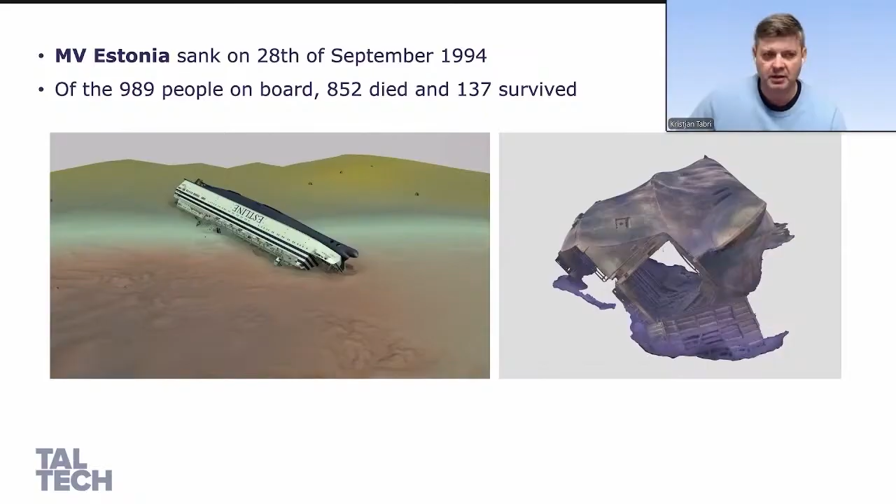After the accident, there was an investigation into what went wrong, why such a vessel sank, and what could be done differently in future. The official investigation was already published in 1997, and it stated that the main reason was that the bow visor of the vessel detached under wave loads, and this opened access to the car deck. When the ship got flooded, it didn't have enough buoyancy to stay afloat, and that's why it sank. Of course, there were always a lot of rumors or speculations around this accident.

Was this official cause really what actually happened, or was there something more involved in this accident? Actually, in 2020, there was new video footage which showed that the ship had quite a large damage on its side. There have always been speculations that there must have been a collision with some submarine or some explosion, that there must be something which made this ship sink, and that it was not only the bow visor that was the reason.

Those new video footage became available for two reasons. First, our technology has improved so much that we could go into 80-meter deep water and get very good camera images from this depth. Another thing is that over time, the vessel had rolled a little bit on the sea bottom, so it revealed what was under the vessel.

This fueled a lot of new speculations, like, hey, we told you there must have been something strange with this accident, because now you see there is a side opening, and this is the reason why this vessel sank.

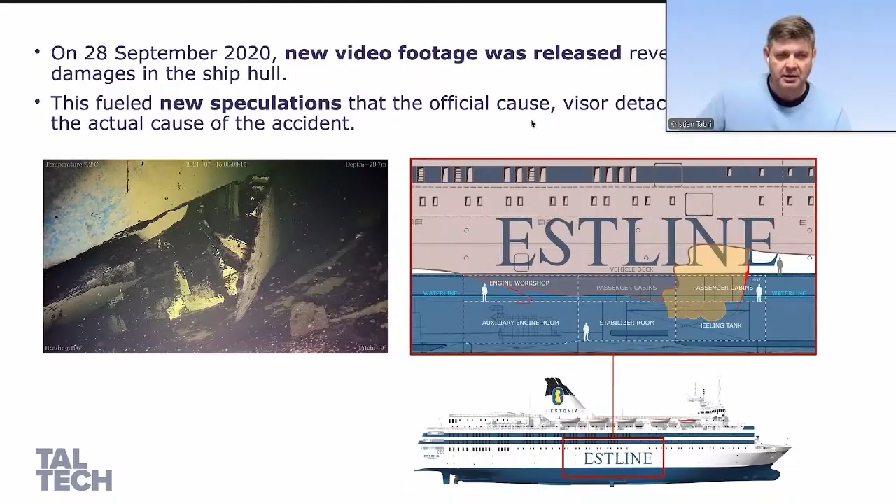This resulted in new investigative activities in 2020. Quite soon it was decided that a preliminary investigation had to be conducted to understand whether the whole investigation of the accident should be reopened. It's a little bit like official terms between those accident investigation bureaus. This initial investigation has now taken 5 years. Now it has been completed, and we can draw the conclusions of what we found out.

The aim of this new investigation was to collect new evidence and to model more or less the whole accident, how it happened. The investigation included quite a lot: a lot of surveys at the wreck site, sea bottom studies, wreck studies, and a lot of different robots were used.

The bow ramp of the vessel was taken to the surface for investigation, and the whole ship was scanned in as much detail as possible to get a full 3D image of the shipwreck as it lies on the sea bottom. This gives us a lot of information, or validation data, to see if we simulate something, whether we end up in the same condition and situation as what we see there now.

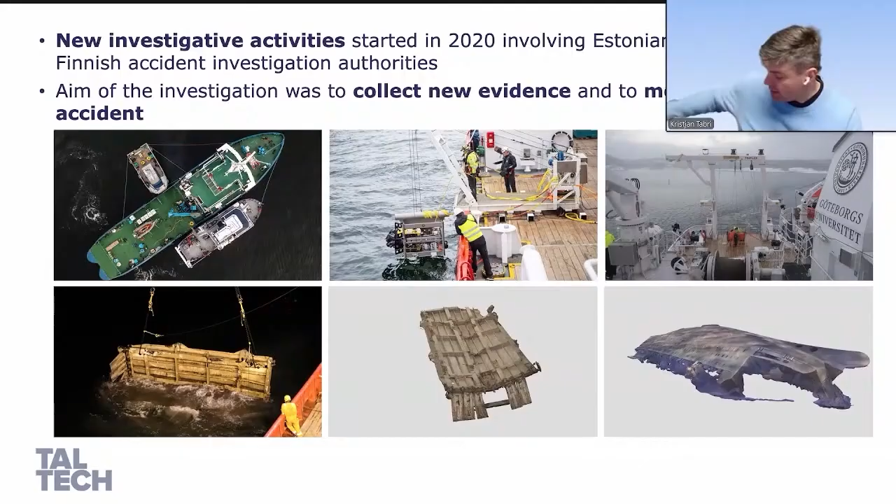Of course, we have to keep in mind that 30 years has passed, so the vessel has shifted on the sea bottom, and it has degraded further. There is some corrosion - of course it's 80 meters deep, so there is not that much oxygen there, but still some oxygen for corrosion. But anyway, a lot of evidence was collected, and quite some material was brought to the surface, which could then be used to validate and see how well we can simulate this accident.

But a little bit of background for the accident: the first Ro-Ro ships appeared in the Baltic Sea in the 60s.

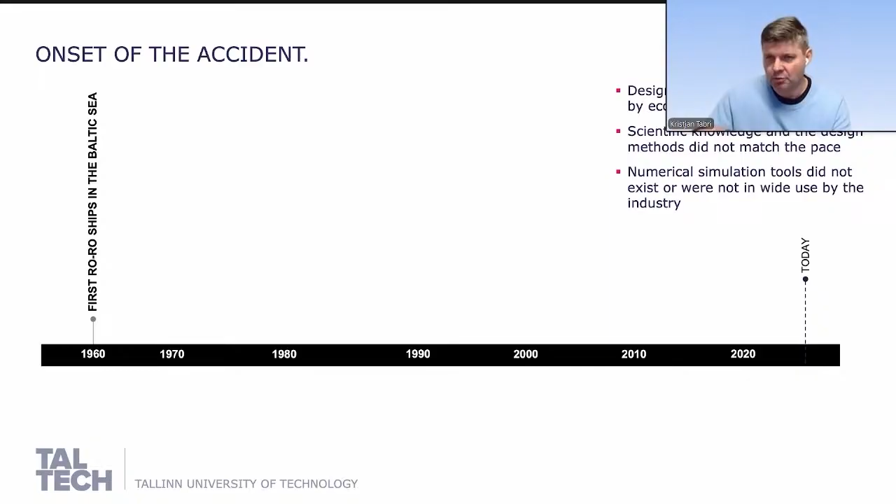Yeah, it was quite a new vessel type where the cars just roll on the ship deck, and also it takes on board the passengers. So it was quite a novel ship type in the Baltic Sea, which is a little bit specific with its relatively short and sharp waves.

But it turned out to be such a suitable vessel type for our waters that this number of ships started to increase with enormous pace. Actually, the increase in the numbers of these Ro-Ro ferries in the Baltic Sea was the greatest in the world. Nowhere else did this ship type see so large usage. For example, at the beginning of the 1960s, 900 trucks were transported by sea, but in the middle of the 90s it was already 140,000. So you can imagine how much more capacity there was to transport all these trucks.

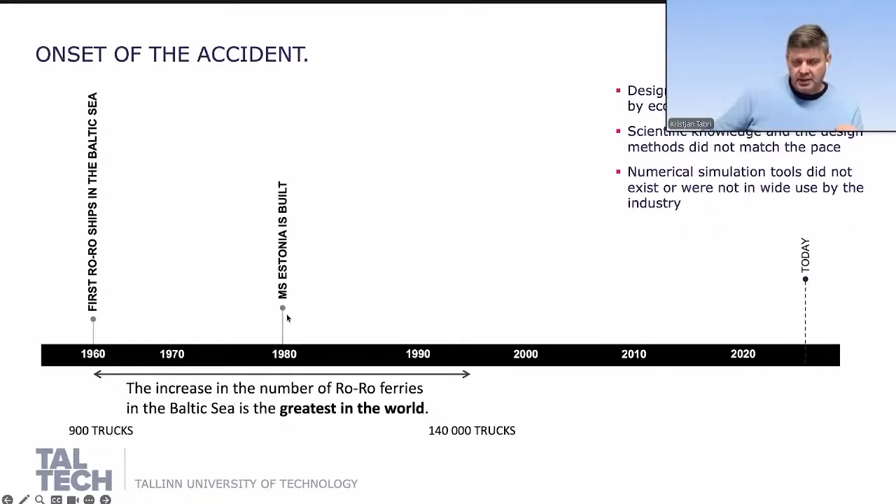The ship itself was built in 1980, so it was designed a few years before that. You can imagine how computers looked at that time - you didn't have this amazing set of tools, computational power, or artificial intelligence that we have nowadays. Your Apple computer looked like that. So you didn't have that many tools to design the ship. It was mainly paper and pen that was used for the designing.

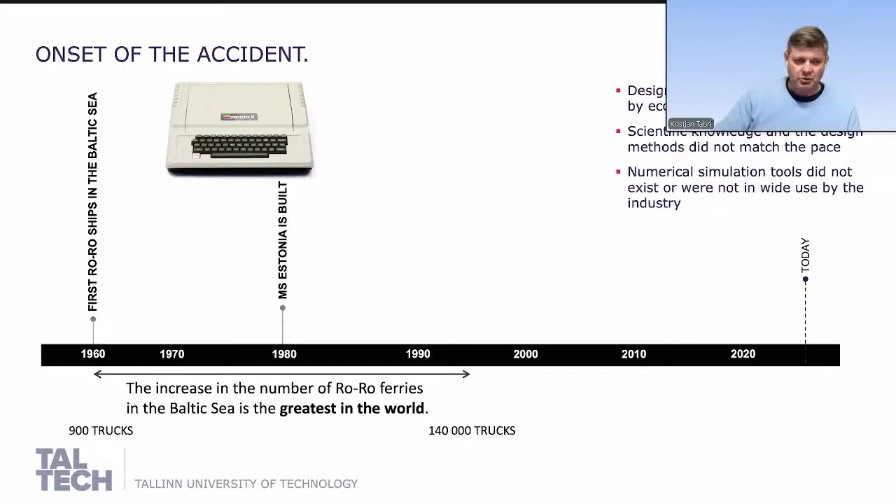Also, numerical simulation methods did not really exist at that time yet. They were there in universities, maybe in some bigger aeronautical companies who used some of the simulation tools, but in the marine engineering field the numerical tools were not really used because they were so new and there was no computational power. So it took 15 to 20 years before the numerical methods we use nowadays to design ships or maritime structures really started to have their role in the engineering or maritime industry.

We talk about computational fluid dynamics to simulate hydrodynamic loads on the ship, finite element methods to simulate how the ship reacts to loads, or fluid structure interaction methods that allow us to put together the water and the structure. So these methods were not there when the ship was designed.

Also, progressive flooding simulation software, which allows us to simulate in very complex ships like Ro-Ro ships, RoPax ships, or cruise ships how the water flows or moves inside the ship if there is an accident, these tools only started to emerge in the middle of the 2000s. Before that, it was very hard to assess such a complex ship - what would happen if it got flooded. So there was quite limited availability of what you could use.

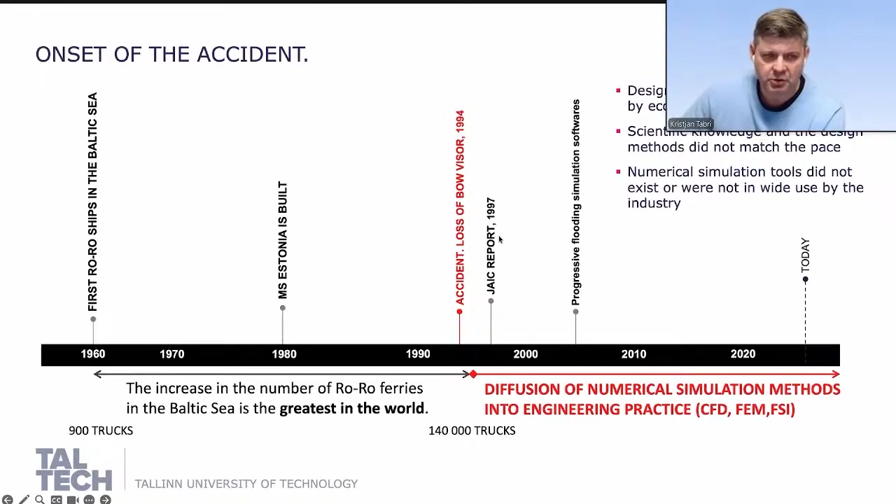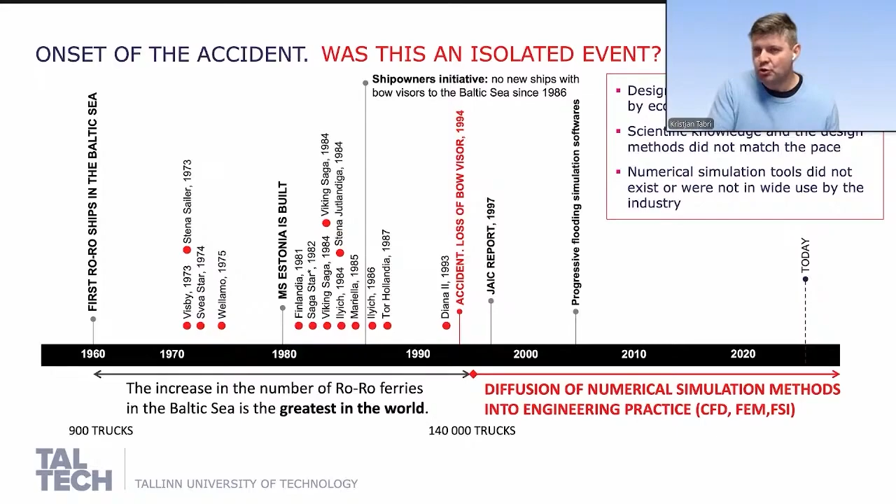Actually, already in 1986, eight years before the accident, the ship owners agreed that they would not build ships anymore with that kind of structural configuration, because it was not good enough. So the knowledge was there, but the ships, of course, still kept sailing. Basically, these ships came to market because the economic competition was so harsh and there was such a strong need for the vessels. But the scientific knowledge, the design methods, and the simulation tools didn't really pick up. So there were no tools to understand how these ships would behave in the Baltic Sea.

And actually Estonia had a very poor design in how the visor works. The visor opens, then the car ramp is lowered, and the cars could go into the ship.

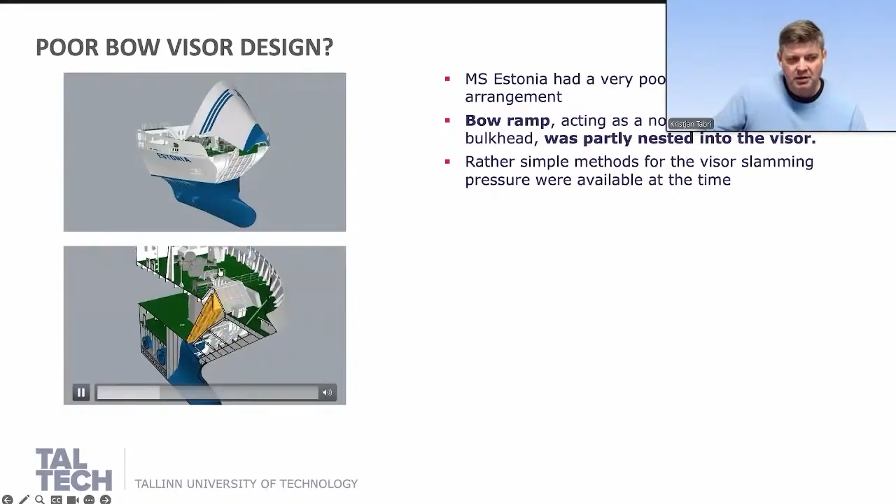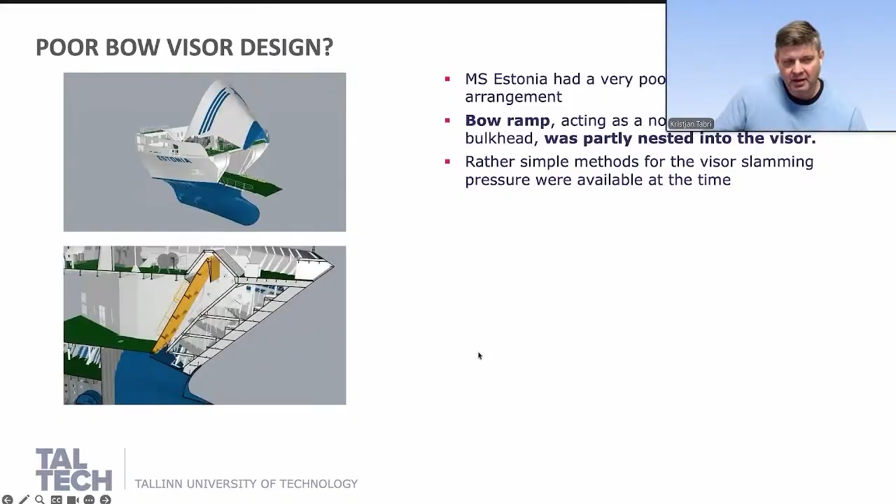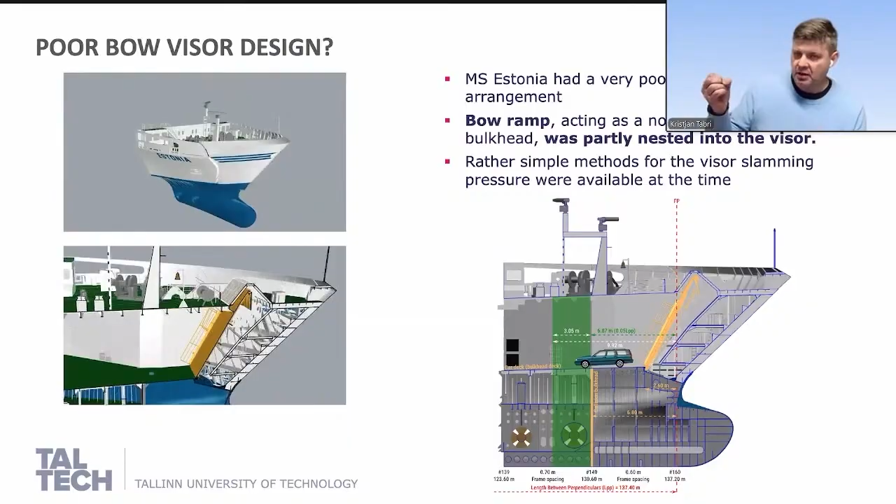In Estonia, the design was such that the car ramp was relatively long, so it had to be fitted partly inside the visor. This means if the visor falls off, it pulls open the bow ramp. But the bow ramp acted as a collision bulkhead. Ships require a collision bulkhead so that if something happens in the bow, it prevents water from entering the ship. In Estonia, the design was such that if the visor failed, the collision bulkhead also failed. So if one piece falls off, the enormous car deck becomes free for water to enter the ship.

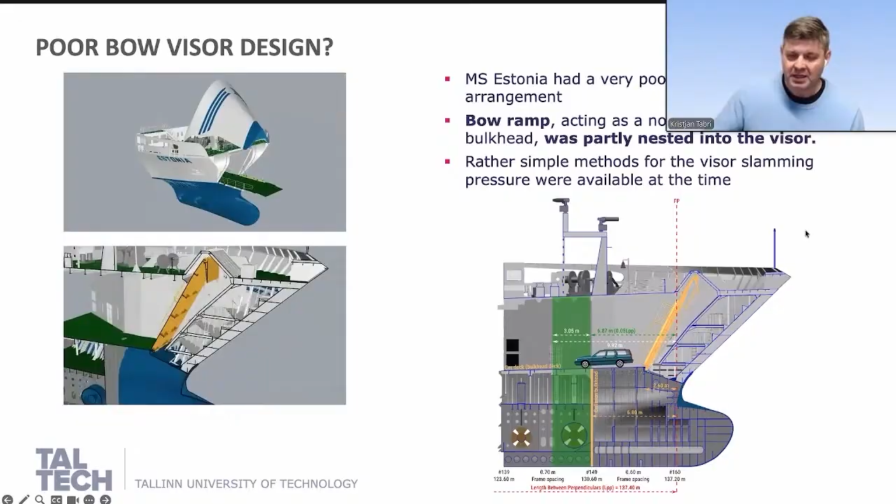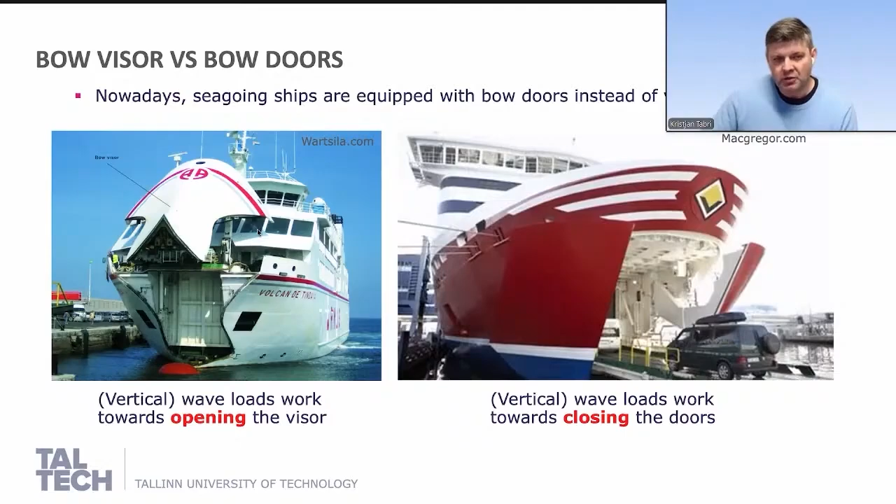What's the situation at the moment? Seagoing ships can't have visors anymore because the design isn't safe enough. Here is a ship with a visor, but if you go to a modern Ropax or Roro ship, you don't see a visor that opens up. You see bow doors which open sideways, and cars enter through these doors. What's the principal difference? For the visor, wave loads try to open it by pushing this rectangular part up. For the bow doors, waves try to close the doors, pushing them against the ship hull. This is a much safer solution compared to a visor which has to fully open. Now all ships going far to open sea need bow doors instead of visors.

Our aim in the project was to really simulate this whole process, so we did quite many different simulation models. We started with wave loads acting on the visor, looking at model scale experiments done in 2007. We prepared a computational fluid dynamics model to simulate wave loads numerically acting on the ship. We also prepared a multi-material arbitrary Lagrangian-Eulerian model to evaluate how much the loads changed once the visor was already open. With those loads, we had a very fine finite element model of the bow area where we then applied them.

The waves come in groups, in sequences, so we could apply these loads to the visor and see how it would respond, and whether the wave loads we estimated were present on the night of the accident were sufficient to break the visor structure. We also prepared a whole ship model to simulate the bottom contact, to see whether the damages found in the new video footage could have occurred when the ship hit the sea bottom - meaning they had nothing to do with the sinking, but occurred as a consequence of the accident.

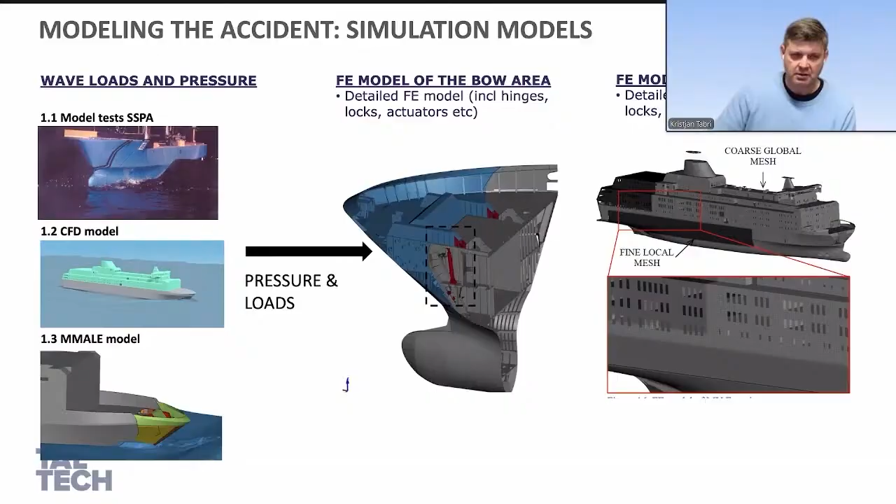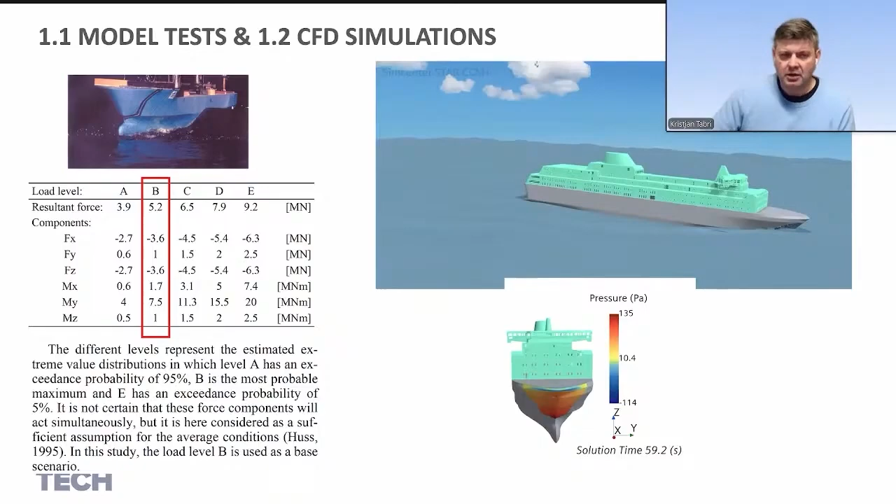Computational fluid dynamics simulations look like that: you have a ship, you have waves, and you can see the pressure distribution and how this pressure correlates to different wave heights and wave directions. So you could get a quite good understanding of the loading condition in your bow structure.

We also did more complex simulations where we modeled the bow visor as a separate part from the ship so that it could pivot. When the visor is closed to the ship it experiences certain loads, but once it's allowed to move, the load level drops a little because the visor simply moves away from the waves. We needed this to construct the realistic load sequence so we could simulate the process from when the visor is fully attached until it's fully torn off the ship.

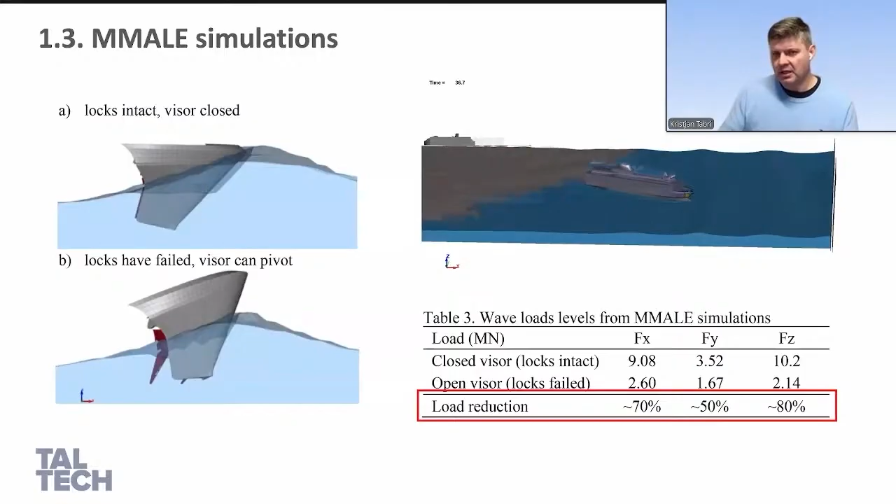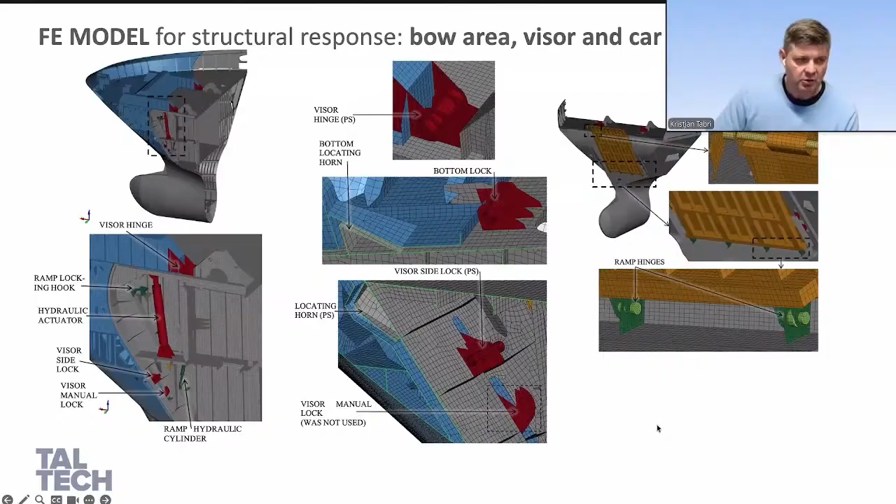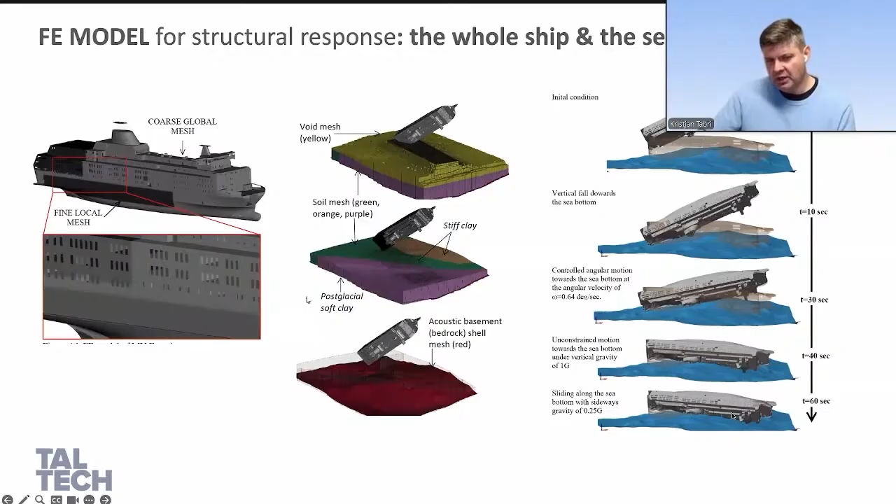This is more or less how the simulation looked. We started in the condition when the ship was already approaching the sea bottom, and then simulated how it fell to the sea bottom. I will show some videos a bit later.

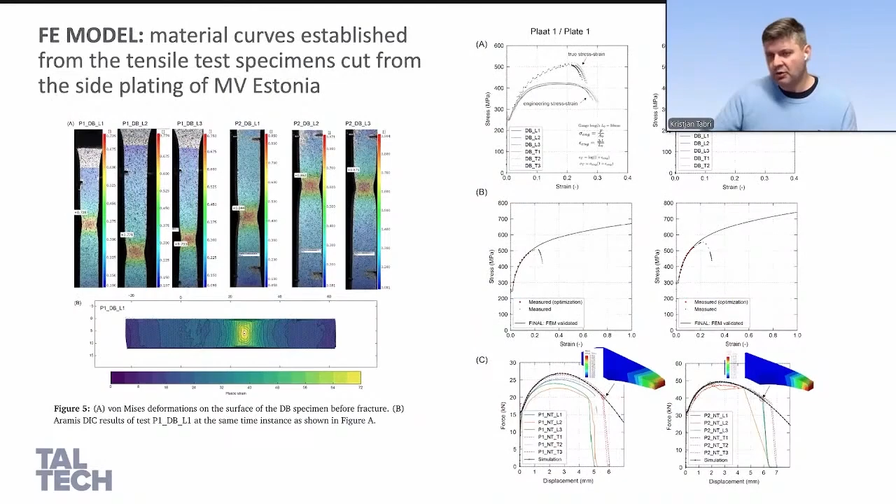Also, some specimens were cut from the actual shipwreck to see what the material properties were, so we were really using the actual materials that the ship was made of.

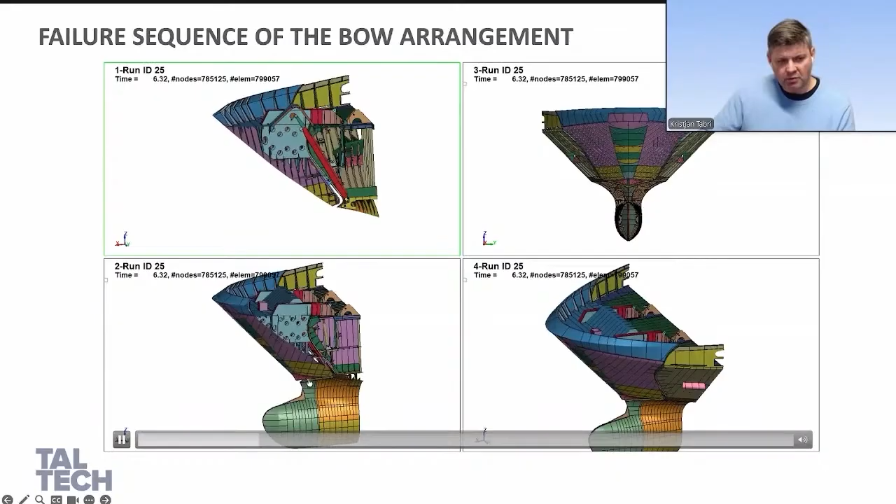This is now the visualization of what happened with the bow structure first when the large waves hit. The first lock, also called the Atlantic lock, was broken. Then the ship had also side locks, which failed very quickly after the bottom lock failed.

Then the ship had some hinges here on the deck. These hinges were also broken quite fast. And then the visor remained attached to the ship only through those quite large actuators or hydraulic cylinders.

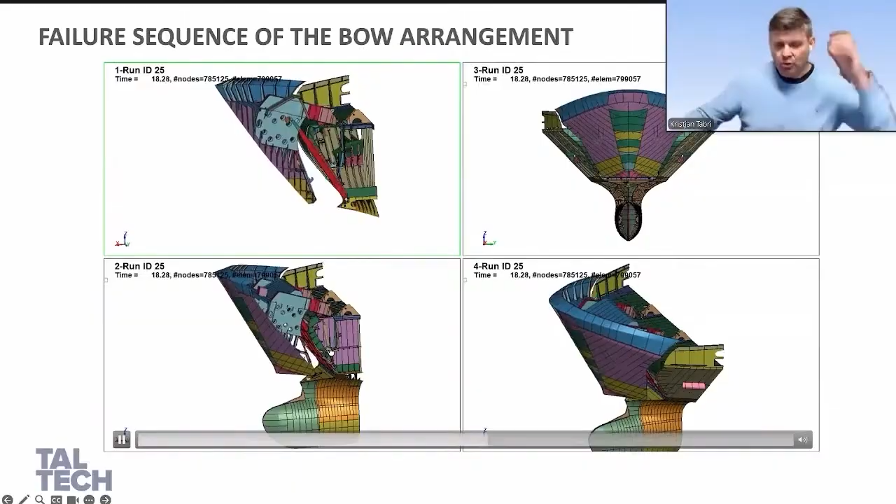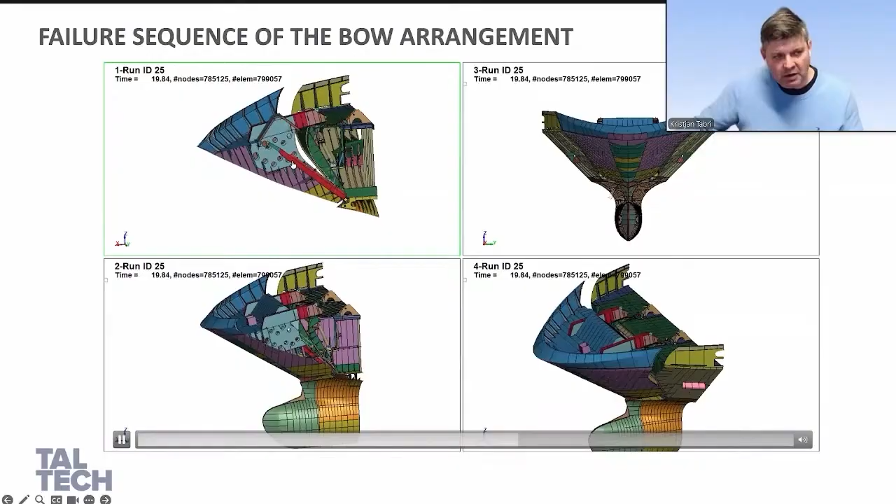Sorry, it's restarted. You see that the bow—I'll scroll back a little—as this visor is moving, it also pulls open the car ramp already, and the movements are quite violent.

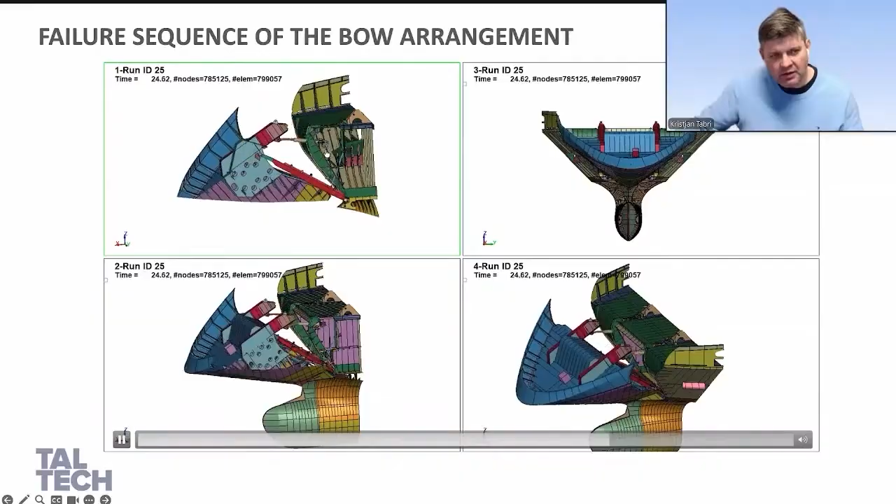So what happens is that these cylinders, which are still holding the visor in place, are pulled through the ship. In front of the ship, it really pulls those cylinders through the forward wall or forward bulkhead of the ship, and we really see in the shipwreck also these locations where the cylinders were pulled through.

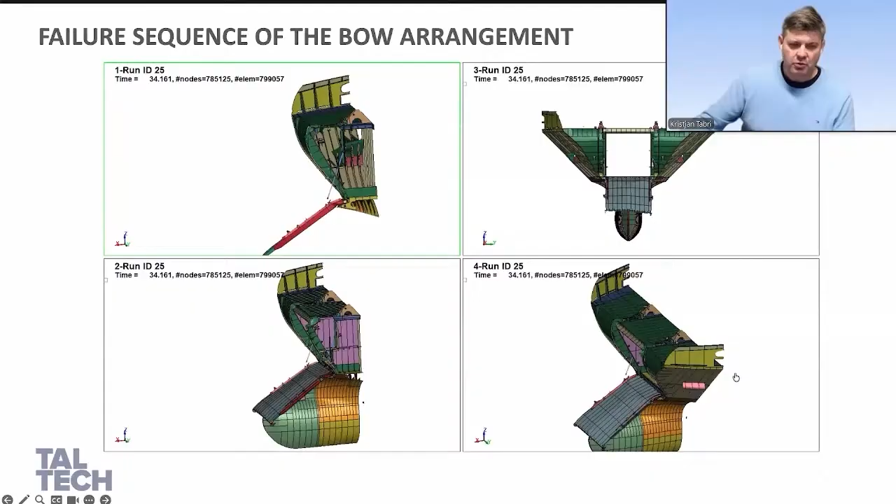So this is more or less how we foresee what happened.

We also had a lot of evidence from the shipwreck, what was left in the wreck, to check whether our simulations corresponded to this. Also in our simulations, we saw that the cylinders were pulled from the deck plating and through the front wall of the ship.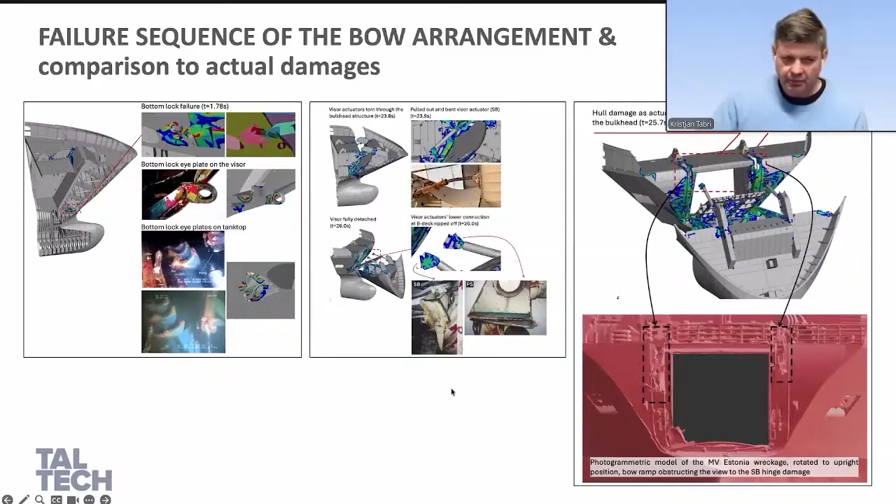And also in the wreck, you see very clearly where those cylinders have been pulled through. So our simulations correlated actually quite well to the reality we saw.

Also, the visor itself has been brought out already years ago. It's in Sweden, and it has quite a lot of damage actually on the visor. We were also capable of explaining very well where those damages came from.

One damage, here, came when the visor fell off and hit the bulbous bow. Then the visor rolled itself around and remained floating in front of the ship for a few seconds, and the ship hit the visor once again, causing this very large damage. But its damage shape corresponds very well to the ship's bow shape.

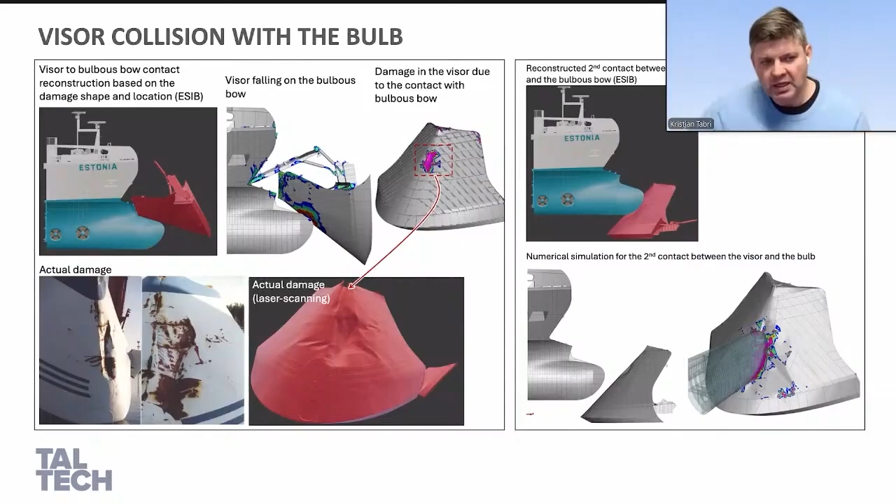So with nowadays tools, we could really explain almost every scratch in the paint. Of course, it's a bit of an exaggeration, but you could really explain most of the deformations that we see in the structure.

Same with the bow ramp. The visor starts falling off, it opens the bow ramp, and the bow ramp also experiences different kinds of deformations. In the simulations, we could repeat those deformations quite well.

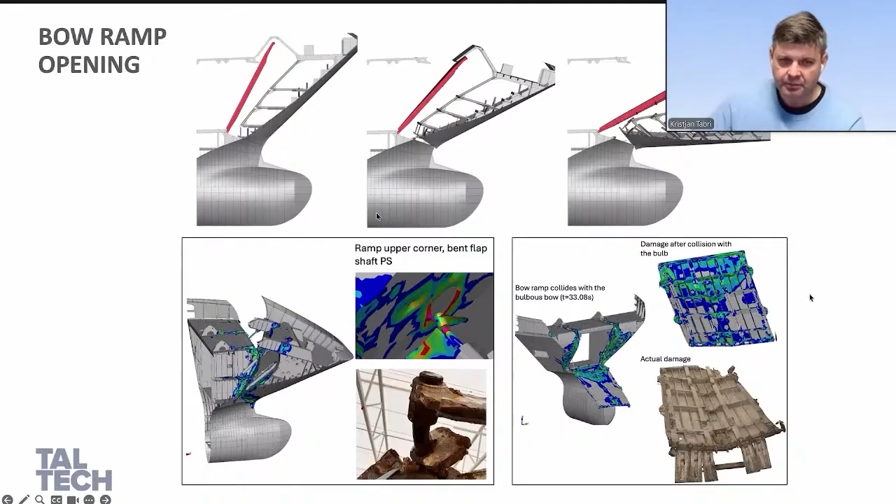Another interesting assessment we did was that after the accident, the bow ramp was still attached to the ship, and that was more or less the initial condition: the shipwreck was on the sea bottom and the bow ramp was still attached to the ship.

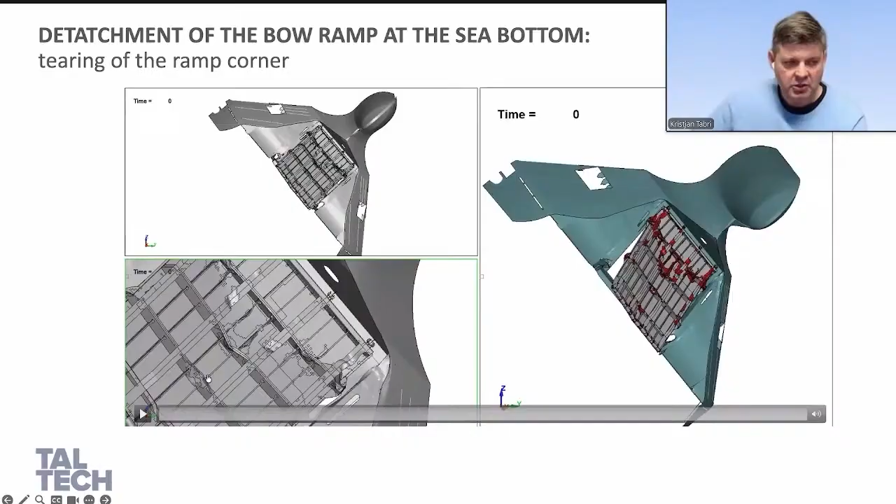But now in those recent investigations, I think in 2021 or 22, they discovered that the bow ramp has fallen off. So what we then simulated was to estimate where there would be corrosion damage in the bow ramp, and what the corrosion could be over 20, 25, or 30 years.

We simulated how, if this corrosion has developed and the ramp is still attached to the vessel, it would be torn off from the ship. And actually, we also managed to achieve the situation we see in the wreck at the moment, that a piece of the bow ramp is still attached to the ship, but the ramp itself has been torn off.

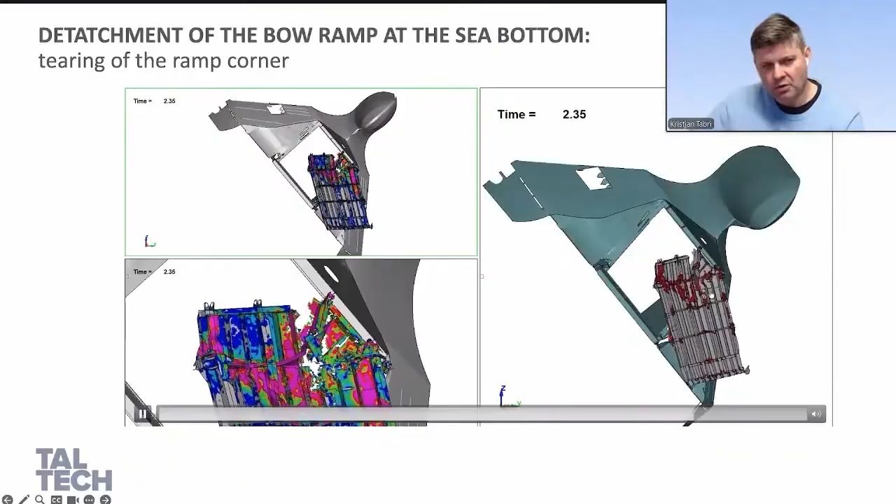So we assumed that the corrosion is strongest in the regions which get a lot of plastic deformation during the sinking, because that's where the paint gets damaged and you become more open to corrosion.

Also, if you look on the shipwreck, we see that the bow ramp lies next to the ship, and part of the bow ramp is still attached through two hinges to the ship.

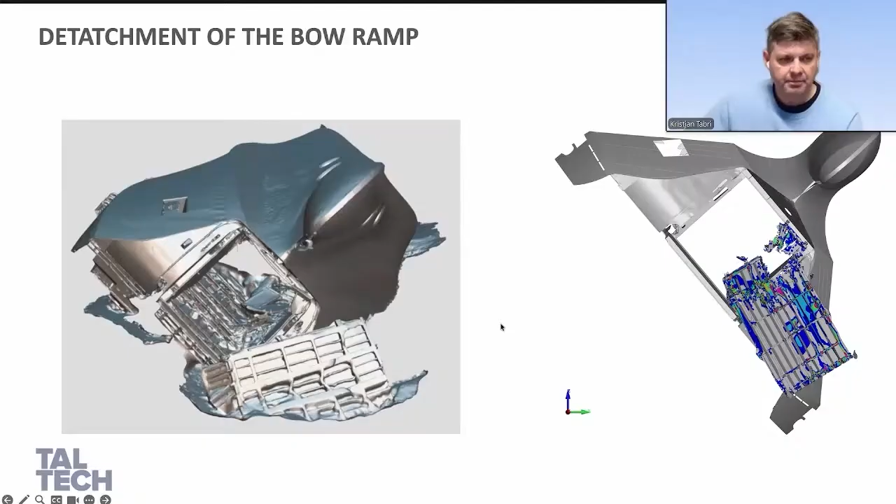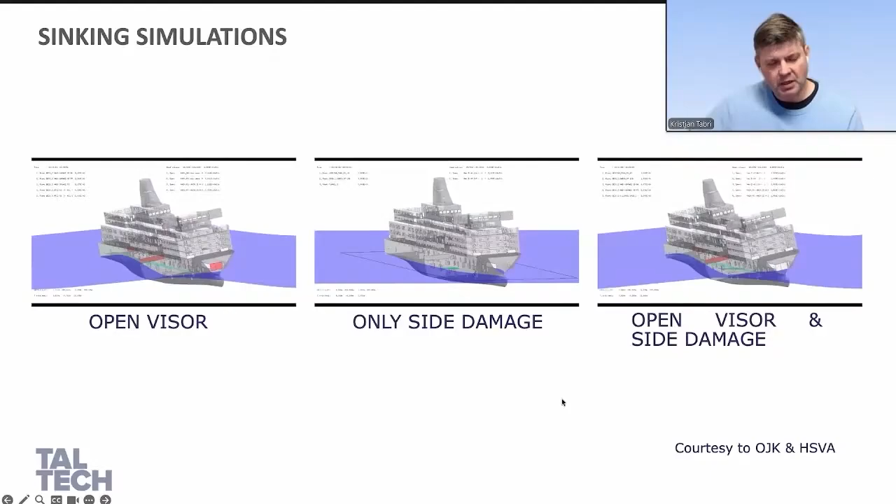This is not our work now, but it's a German consortium which was subcontracted by the Estonian Accident Investigation Bureau.

They also simulated the different scenarios: how would the ship sink if the visor is open, how would it sink if there would only be side damage, and how would it sink if the visor is open and there is also side damage. So you could really take the different assumptions and see how the ship would behave in those different conditions.

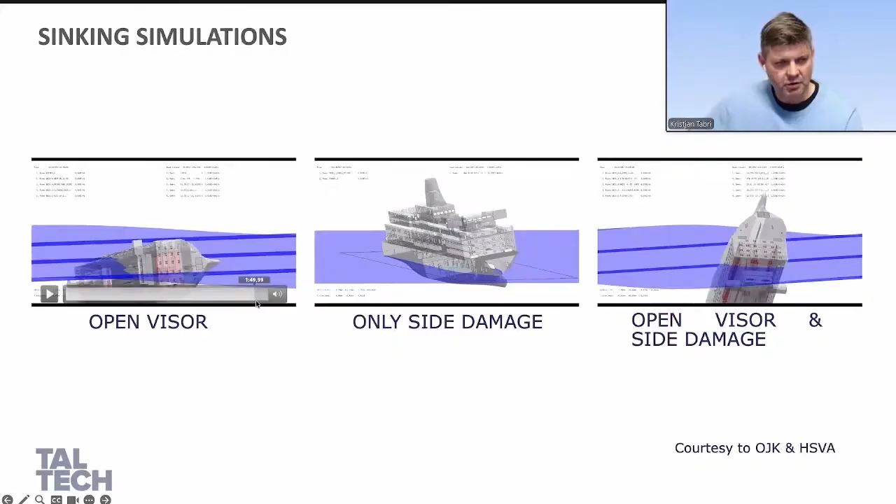Only with side damage, the sinking was much slower compared to what happened in reality. With side damage and an open visor, it was a bit too fast. Actually, if the open visor was assumed, then the sinking sequence and duration corresponded quite well to the witnesses' testimonies. I'll scroll a little further, but that's how these simulations ended.

We also conducted simulations of how the ship would hit the sea bottom. Here we only visualized the acoustic sea bottom - we removed the soft sea bottom because otherwise it's not that easy to see what goes on there. But that's basically how this bottom contact process was simulated.

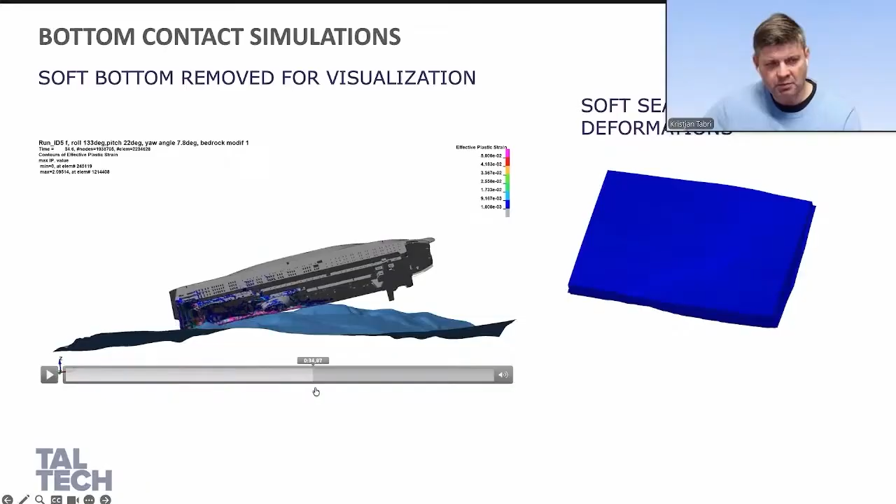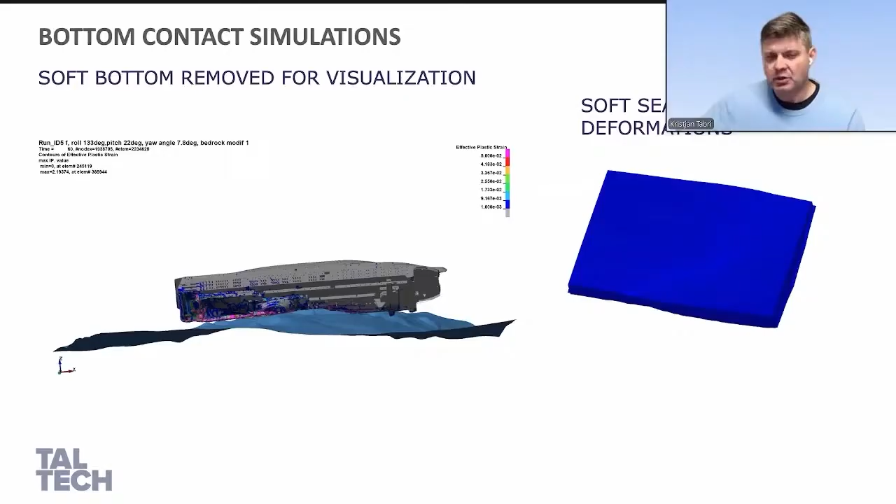As a result, we could get quite a good estimate for the damages that should be on the ship structure. We could then compare these to the 3D model of the shipwreck to see whether they correspond well. We also had this very soft sea bottom action on top here.

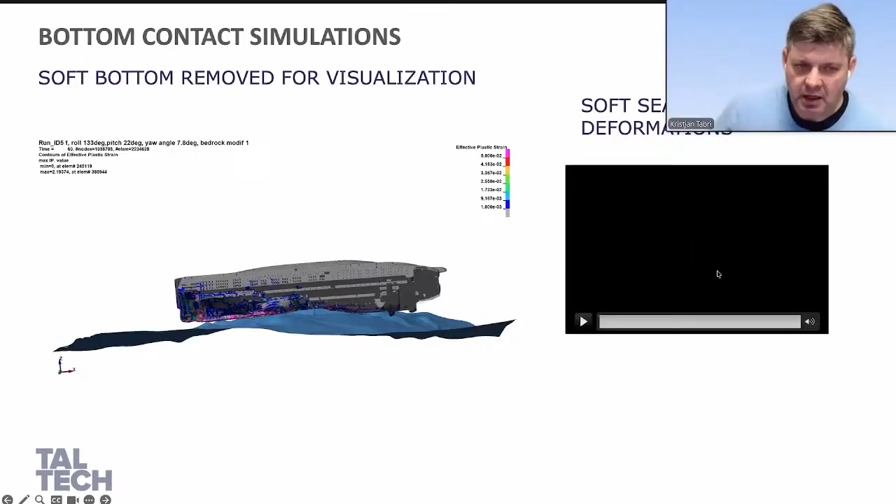This is how this soft sea bottom is pushed away. From some regions where the center part of the ship is, you see that this acoustic bottom becomes visible. This acoustic bottom is then the rigid bottom, which causes the main damage to the ship hull.

I see that I have only one minute left, so I'll quickly scroll through a few more videos which show how our simulations correspond to the current position of the shipwreck.

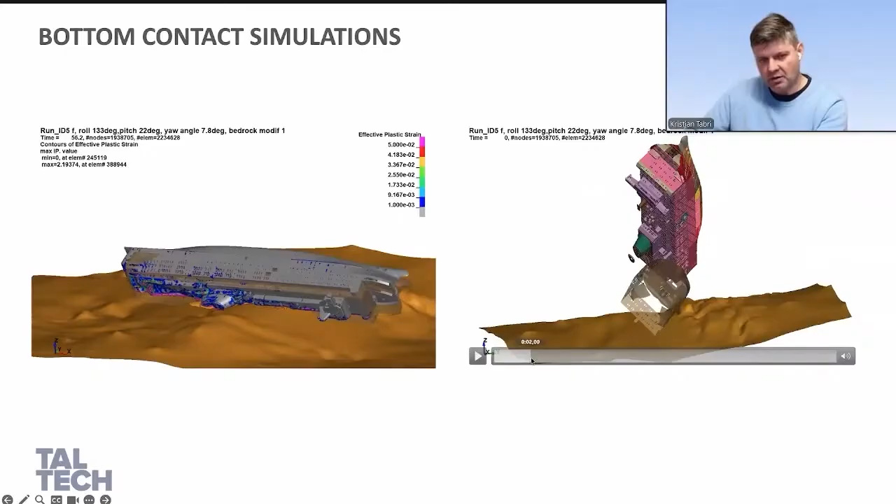This brownish transparent model is the ship's current position. In our simulations, we achieved quite comparably the same position for the shipwreck, which means our calculations are not too far off.

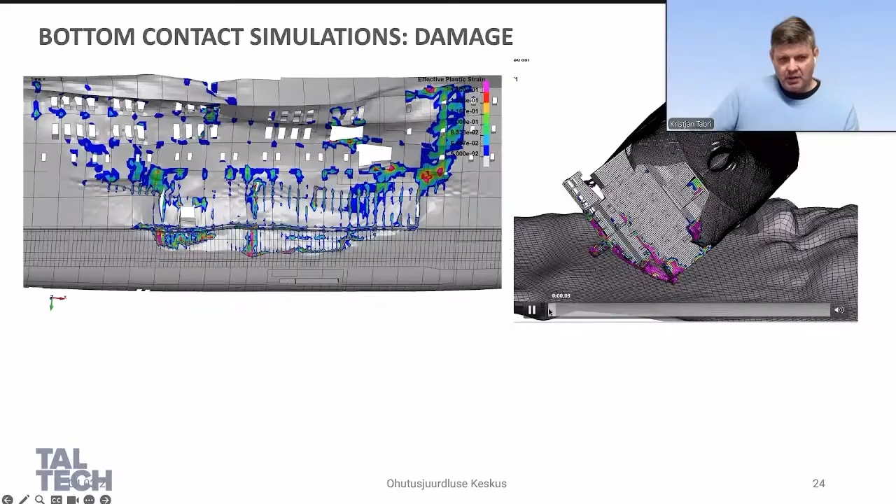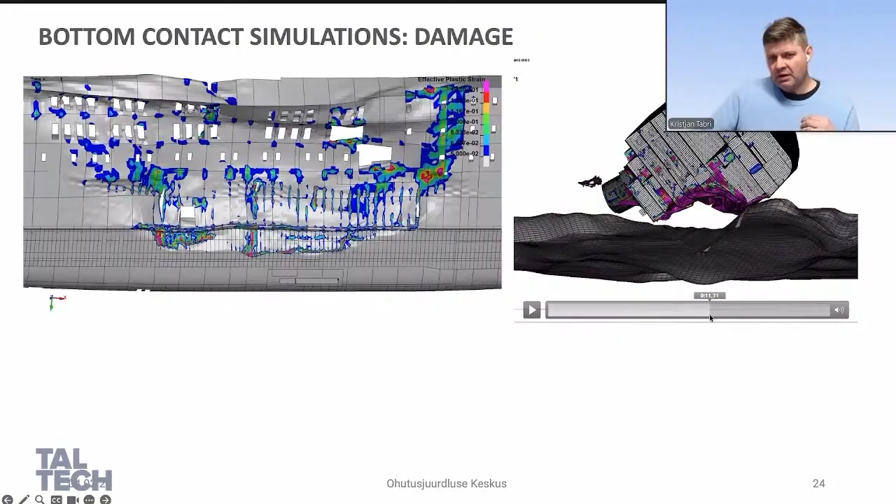We could also look locally at what the deformations and damages to the ship hull are, and the extent of the damage in the ship. If we cut slices from the ship, we see that in the middle of the ship, the damage is actually very extensive - you have like a quarter of the ship completely pushed together.

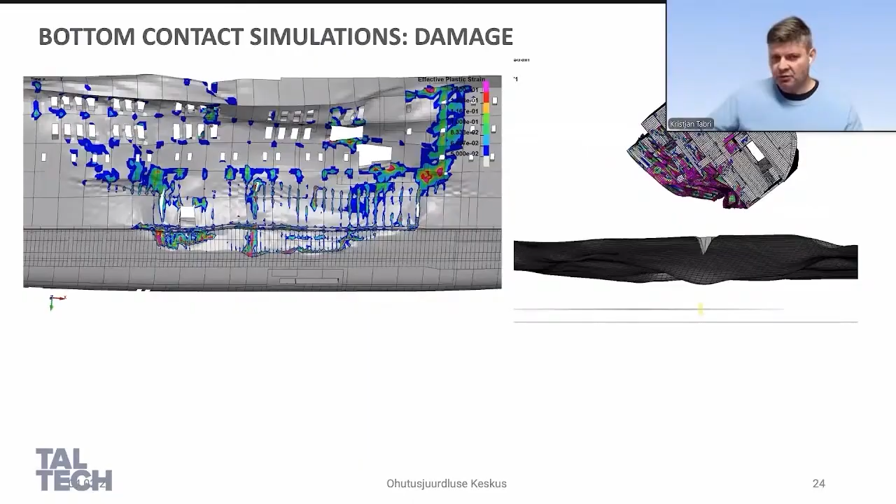What we could see from those videos presents only a small part of the damages, because a lot of damage is actually covered by this soft sea bottom and we don't fully see them. Also, what we saw in the simulations and the actual condition of the ship corresponds quite well to the damages we have seen in the shipwreck.

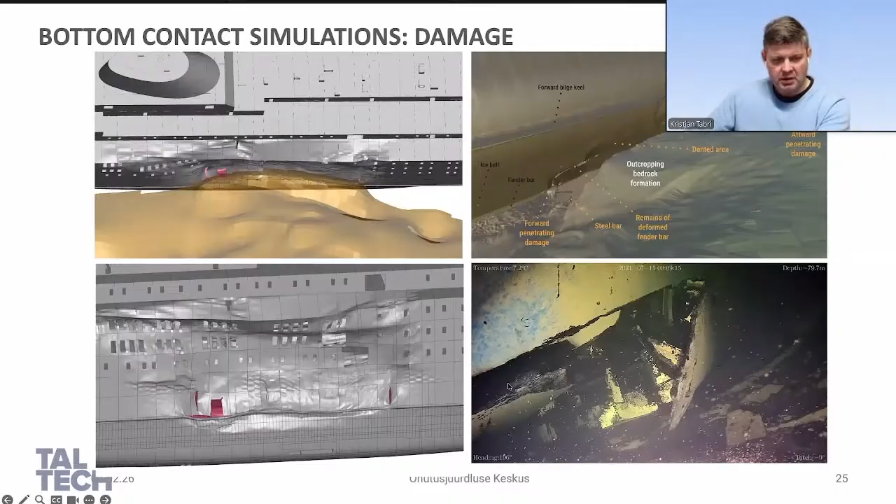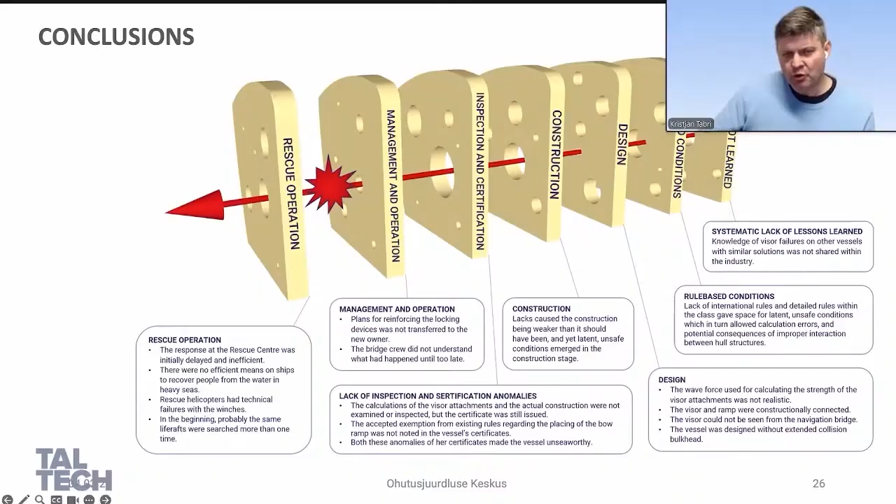The rules didn't really follow the ship type, and the rules were not appropriate for these ship types. It was a poor design, it was poor construction as well, and perhaps also inspection and certification was not done as it should have been. So quite a lot of issues have to go wrong for that kind of major accident to occur.

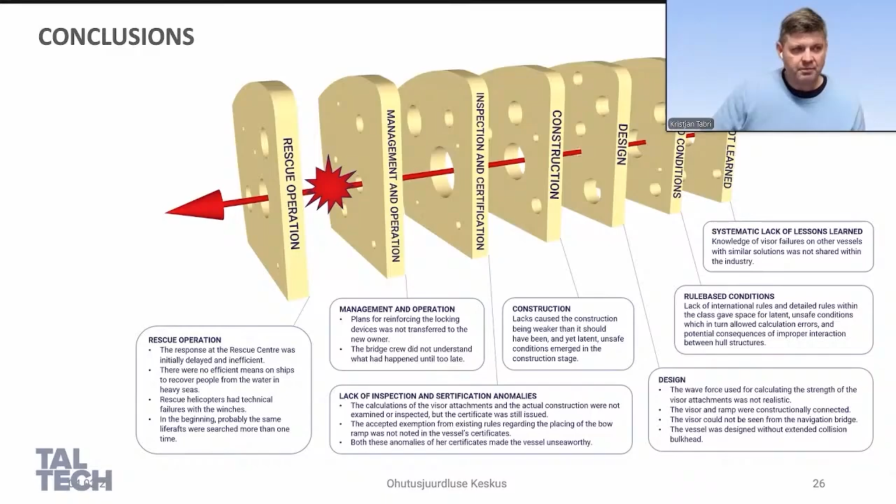No, thanks a lot. It was very interesting and very comprehensive, the models that were showing. Yeah, it's okay, a very big tragedy about Estonia. But again, it's a lot of lesson learned probably after the tragedy.

It's very interesting how you modeled such different, difficult and big constructions. So it probably takes a lot of time to model everything. Yeah, it was quite a big group with several companies and persons involved, so it was obviously a team effort. In addition to our university, there were 3 or 4 engineering offices involved to prepare the models and conduct the simulations, a lot of partners to deliver that kind of study.

And maybe a good outcome from it. There was a lot of speculation about the human factor and so on, but showing your models, it's clearly seen what is just technical things, technical faults. Yes, but of course, in those technical issues, you also have a human factor included a bit, like why wasn't this information shared properly, why wasn't something done already before the accident. But that's how it often goes, you need one big major accident for the legislation to change.

Just to make sure, the other hypotheses, those flooding simulations were also done for different hypotheses, but we didn't study any collisions with other objects, because that study would be more or less the same scale as this one, and it can't be done without a very solid plan and very solid team. But I would say, for us, it shows that all this can be explained by the laws of physics, basically. So in order to construct a sequence different from that, you would have to have a lot of events with extremely small probabilities lining up. So I would say, if physics explains that, you could always construct some very strange scenarios, but we didn't do it.

Okay, thank you, but good question. Thank you, oh thanks a lot. Yeah sure, we have one more question, and I think we can continue. So the next speaker would like to ask a question.

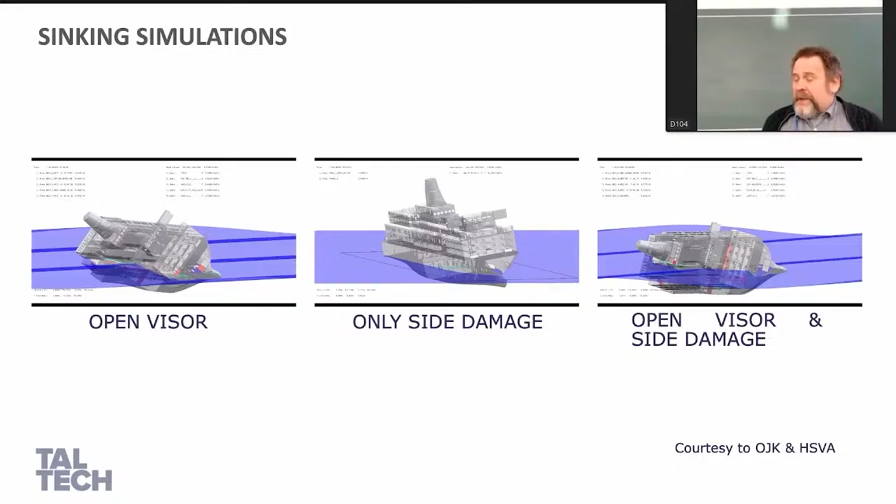Okay good, my question is, you did really impressive work, I really appreciate it and thank you very much for sharing that with us. But my question is, do you really think that with the tools which existed in the 1990s it is impossible to simulate and get those findings which you got?

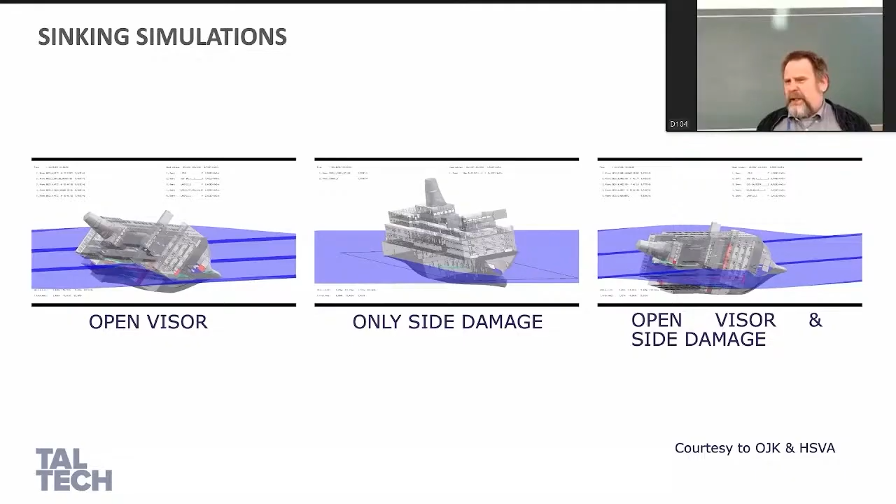Because let's say we have a good estimation of wave pressure on this bow visor, and we have a good mechanical model for this visor, just mechanical finite element submodels from the hinge, for example. If so, maybe that could already give that answer in the 90s if someone would look at it. Yes, I would say this official investigation report in 1997 more or less reached the same conclusions as we did. So in the 90s, they already said this is the most probable cause.

But of course, when the ship was designed, the tools were even less developed. Apparently the pressure values used for wave loads and slamming were significantly underestimated. This has been proven, and the legislation for the visor locking changed a few years after Estonia was built. Estonia had 3 locks, and in the new regulations it should have had at least 7 locks. So it was realized quite quickly after the ship was built that there should be a much larger number of locks, but this didn't apply to already built ships. But in the 90s, they more or less came to the same conclusion already.